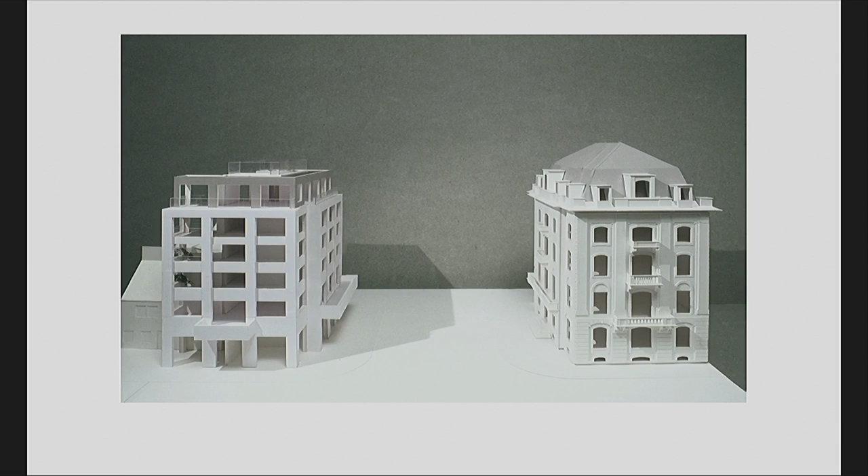And this is what it's like. It has balconies here. And this square, which began as a classically ideal square, bit by bit has become humanized as people live in it.

So the work that we're doing here, the house that we're making here, this apartment building, is not about the intentions of the classical plan, but rather about what the classical plan has become through human action.

And when you're in that building, you really are in the city, looking at the church and the figures on the top.

And interestingly, all governments choose architects of merit and then let them do their work. The embassy's meaning is the creativity of the country. But for us, it was important to understand what that imagery might be.

So it's a very simple double facade. It's ventilated in the summer and closed in the winter.

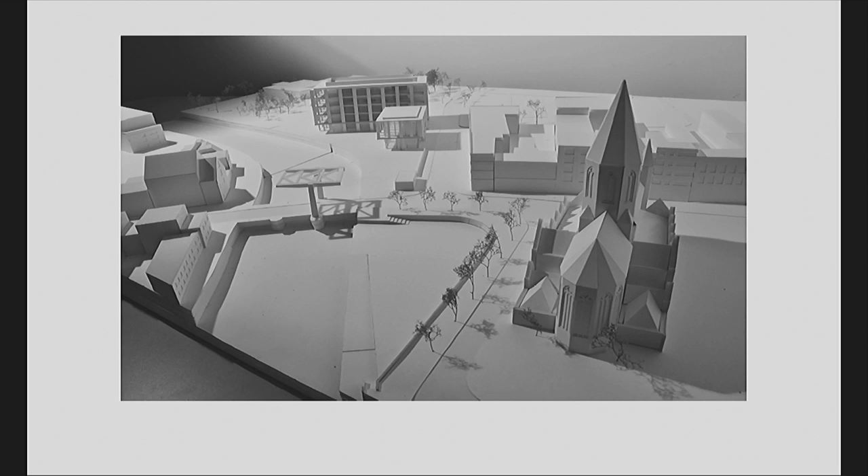Currently we're making a building in Deinze in Belgium. This is the church, and this is the river. It's in two parts: it has a council chamber on the front where you can see the council at work in the night and in the day, and at the back is a block, an office block for city officials. Each of those buildings has a shaded loggia.

So it's a low energy building. You keep the sun off it. It has ground source heat and natural ventilation.

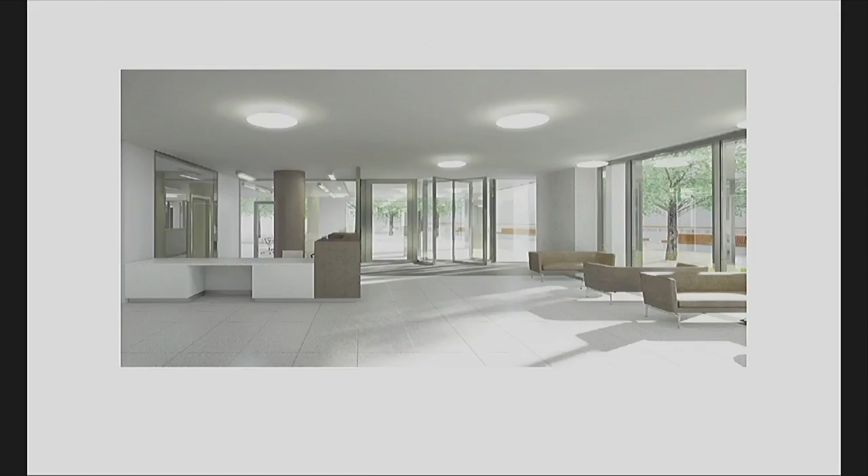These renderings show the inside. That's the entrance hall, this is the cafe, and you can see from inside that you see the city. Most interestingly, this rendering of the council chamber shows how closely the politicians will have to feel to the city, and how closely the people in the city will feel to the politicians.

The office spaces are very simple. They have concrete ceilings, natural ventilation, a little bit of air through the floor, ground source heat. It's very low energy. These are some construction photographs of it now—it's under construction, just to give you an impression of how it's turning out.

So it's an experiment with the kind of materials that you regularly use in Belgium. What can you do with these rather conventional materials? What can you say with them?

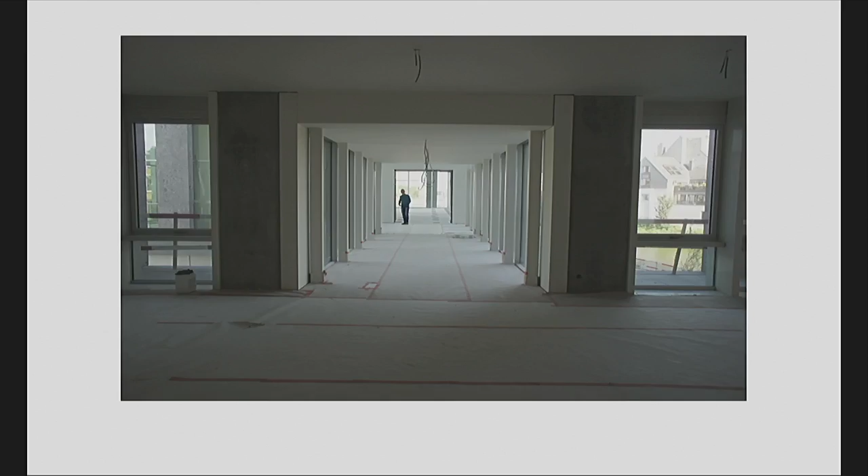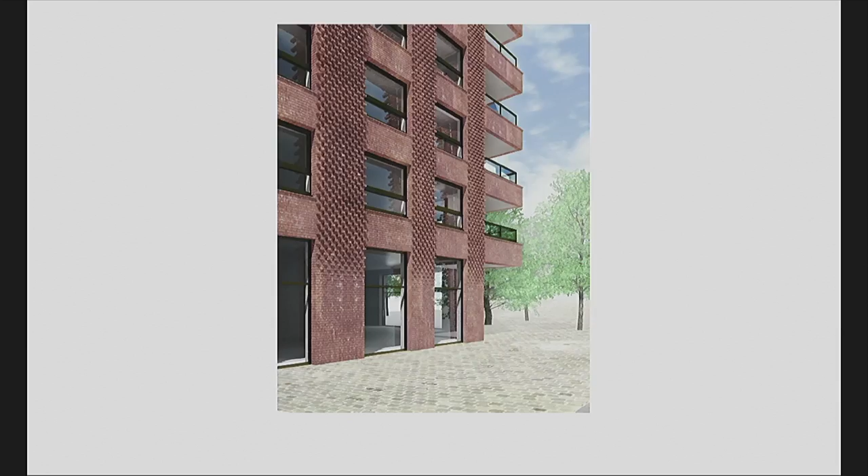Well, you make brick interesting by creating a vertical emphasis on one and a horizontal emphasis on the other. And like the Amsterdam building, this is a very plain building which has moments like this which occur very pragmatically and give the building interest.

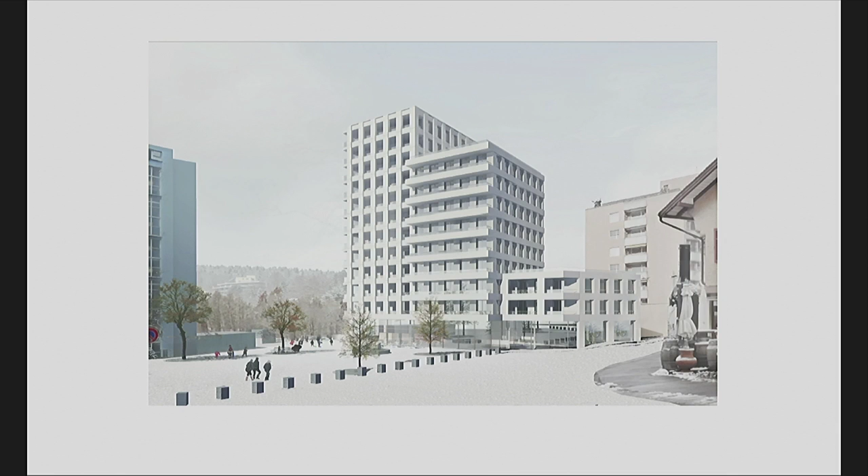So by having this shape, we have 4 apartments that face over to the waterfall, and then 3 apartments per floor that face to the plaza here, but also have views off their balcony to the waterfall. And then a small building here, which is just a loft, we think. And that drops so that this existing building still sees south light.

In Switzerland, that's important. It's very communitarian. You have to put your project to the city. It has to be voted on, so you have to be very careful of these things.

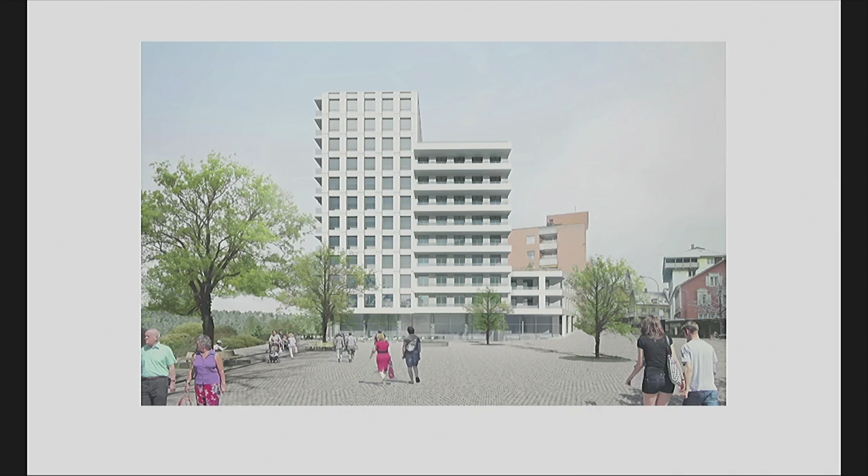And from the Antwerp towers, I'm beginning to make an architecture which is extremely plain, very obvious, where these are very vertical, this is very horizontal, and this vocabulary of forms is played out in different ways. But it gives you something, it gives you great pleasure. As I said in the Amsterdam building, you can start simply and you can get great results.

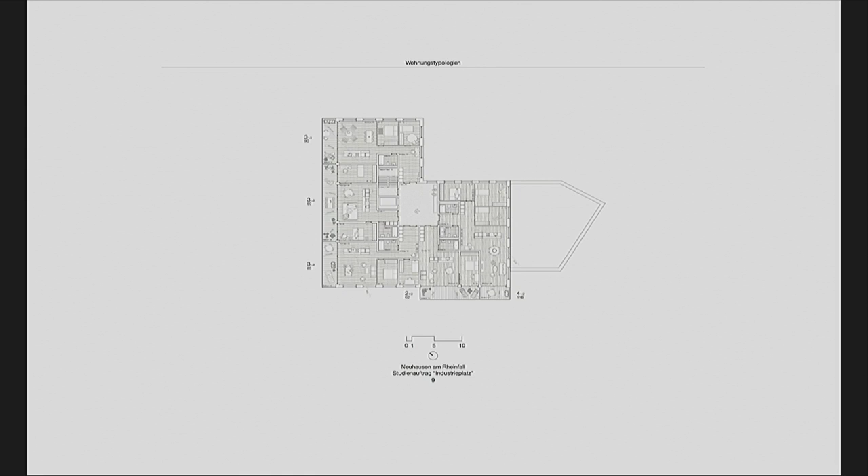And on the plaza there's a cafe, so it will really be urban, because a new station is being built here, so it really is part of the center of the town now. And you can see the plan here. It has 6 apartments around the core. The core has got daylight.

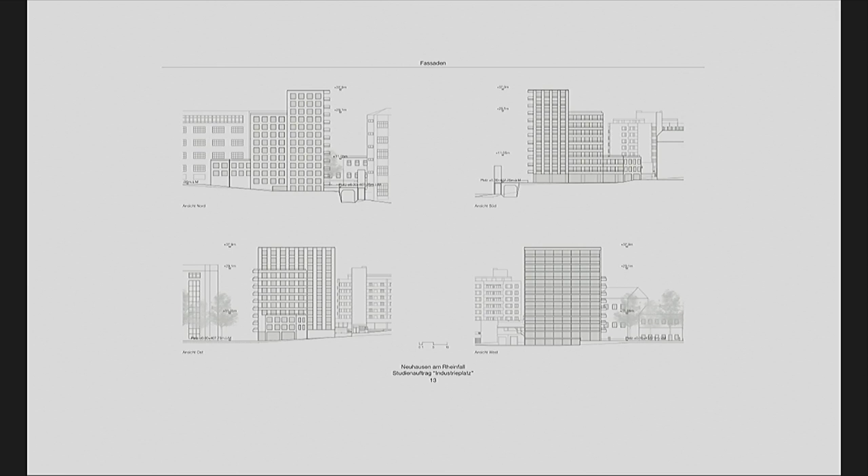And then the facades have a small vocabulary which is used in different ways. When it faces the waterfall, it's very reflective. Where it faces the city, it has solidity, and it's made of white concrete.

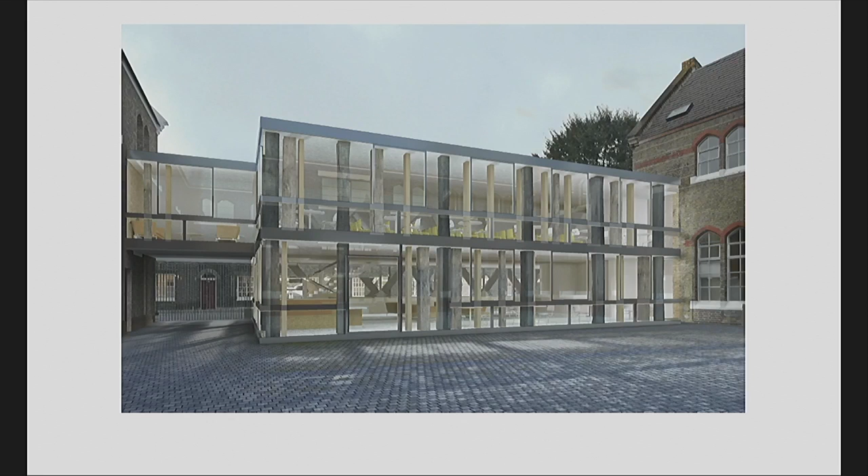So it's a real ironic combination of different styles. Front being brick, the back being rather Miesian, and on the top floor you can see that those two styles come together in a strange way and produce a space which is really quite unplaceable.